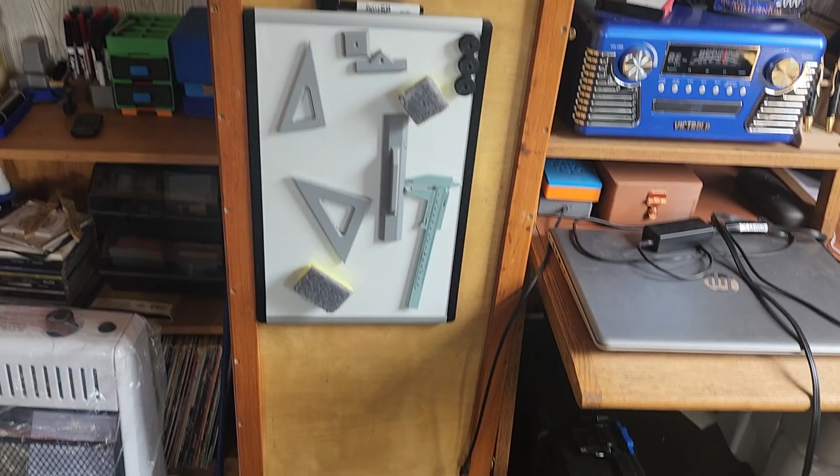This is also storage for my filaments. It's a little better storage than what I currently have, and if you open it up, you can see I got a rack to store different filaments on.

Used to hold my telescope. I had a 10-inch telescope that I stuck in there when I went on a little star party type trips.

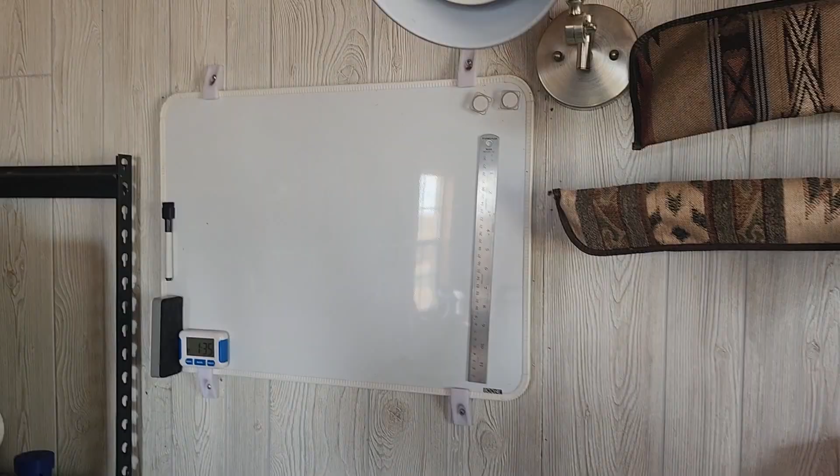Miscellaneous stuff, of course. Got to have bows and black powder when you're out here, so got that, built that rack too. Coming around over here, I got a little whiteboard to keep me going as far as when I got an idea in my head.

I can start drawing with it. And my shelf up here of miscellaneous stuff that I've printed and made, my little foundry area.

So I'll show you my very first printer. These are the second printers I bought. This one was first. That's second, because I liked the first one well enough.

And I bought this last one about December. Bought it then, and this one works really good. I wish I would have bought that one first, but that's not the way life works sometimes.

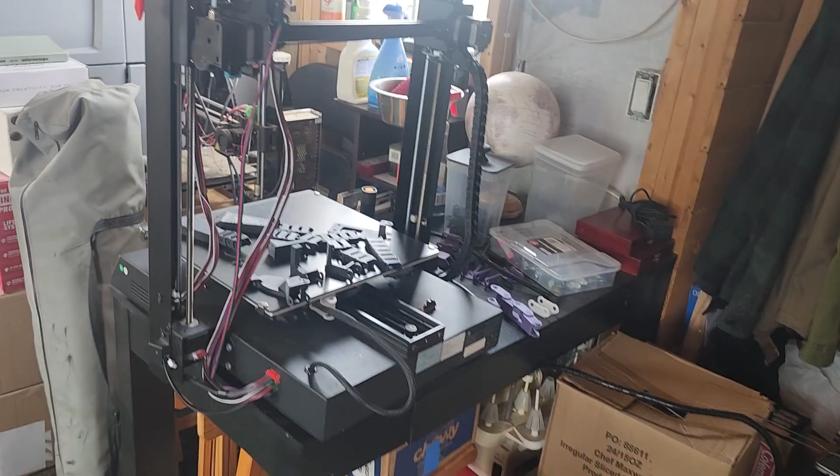And my latest acquisition, excuse the mess, is this one here. And I'm going to get into some parts I had to make for it.

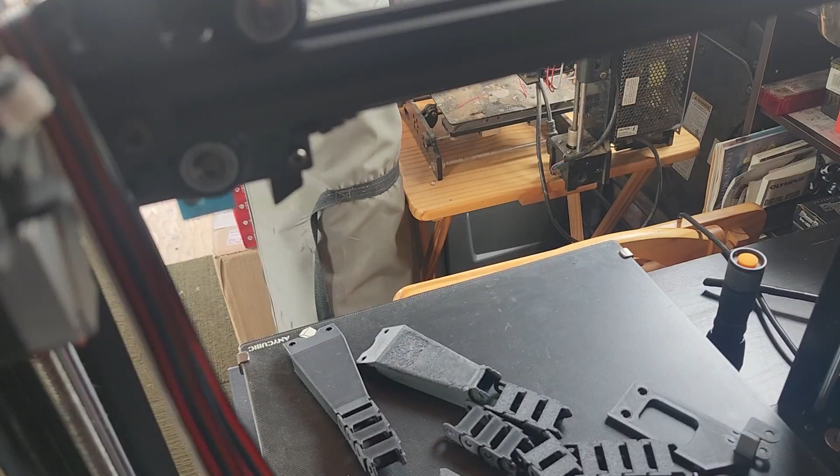Some of the parts are down here. I had to remake this part, and let's see if I can get a good picture of it. This one came up and sat right in here, like so, but it did - oops, there it is.

It didn't work out quite the way I wanted it to, because apparently from the time this part was designed, the printer was changed. The other part I made was this piece right here.

I made a couple iterations of that because I made a mistake when I drew it up.

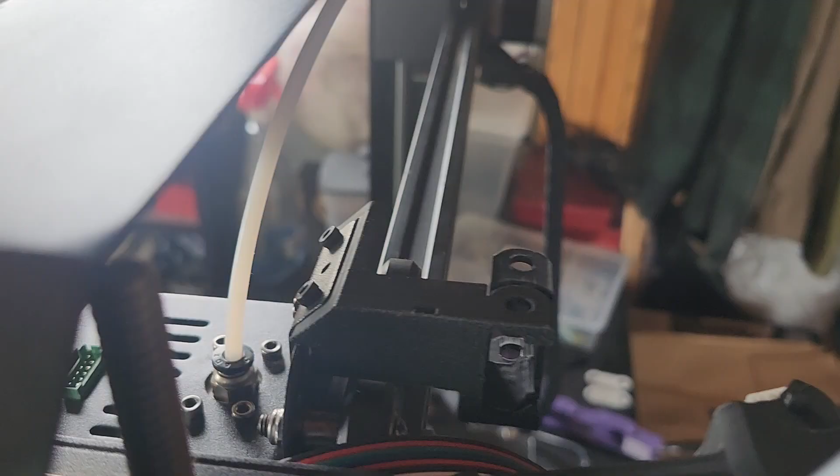This piece over here is at a 45-degree angle. When it was designed originally, it was straight up and down with a slot in it that was supposed to fit over that metal bracket. That didn't work, so I had to remake that.

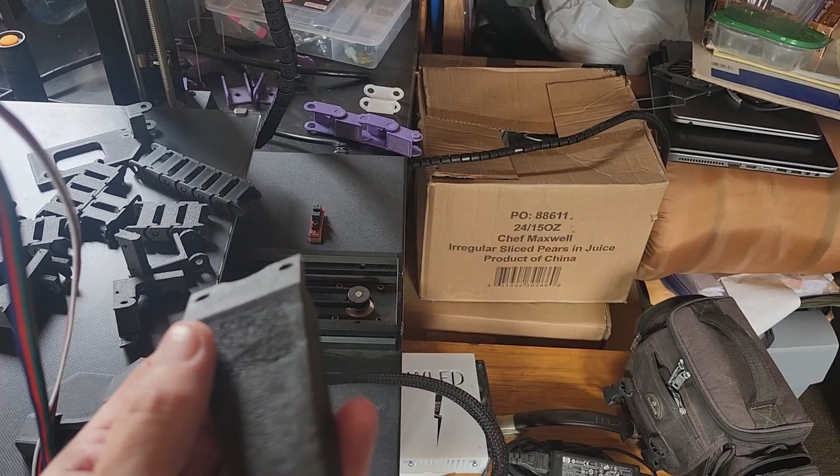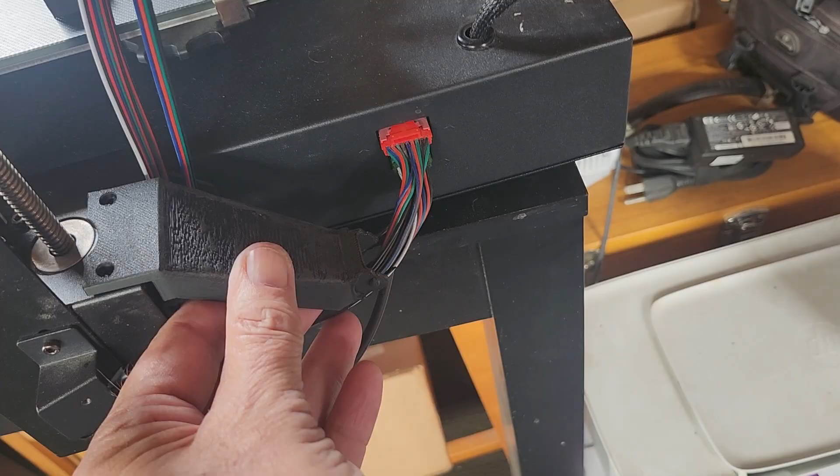And the last piece, excuse the nastiness of this, this is all my fault. You can see how bad that is. I was messing with the supports and it didn't work out quite right. It's kind of nasty and didn't fit right. This one fits down here, but see where the wires would come out, they're going to interfere with all these here.

So I redesigned it, made this piece, and it looks a lot better than what I had. It sits up here, and when it comes out over this area, it goes over the top of all these plugs, so it misses that entirely.

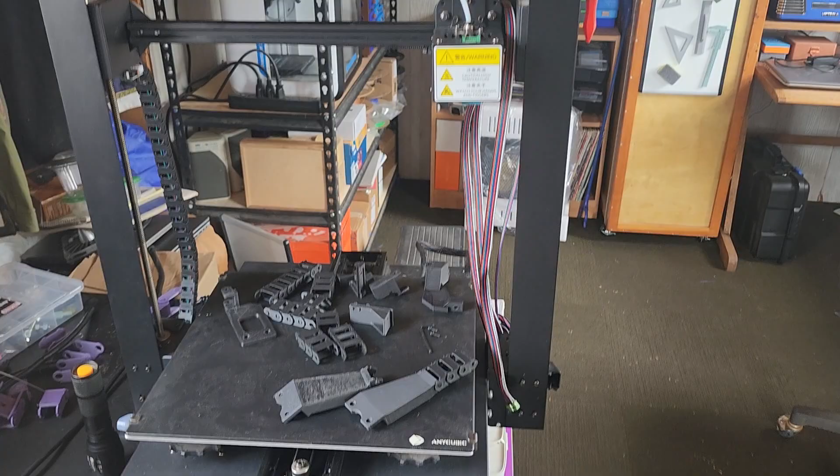This is my latest acquisition. I thought I got a good price on it, and she thought she got a good price on it because she was just going to throw it away. I decided to refurbish it, so I'm making new cable chains.

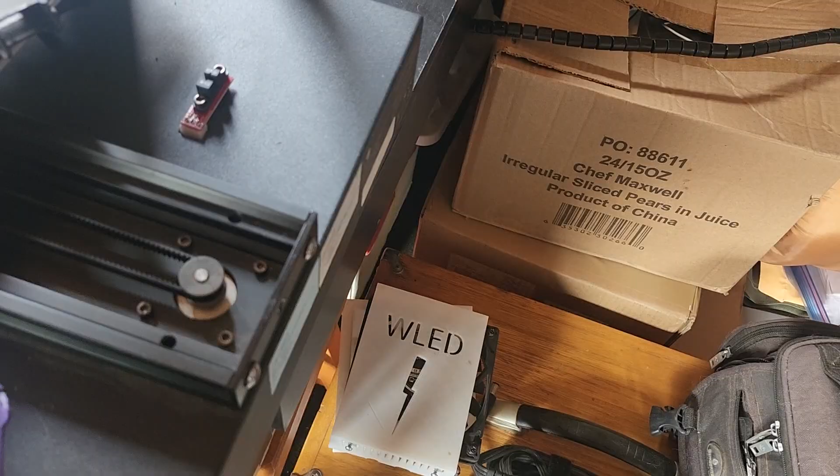This is the first one I got on here. He had these big ones on there, and they sat down at the bottom in here, like so. I didn't care for that, so I found these cable chains.

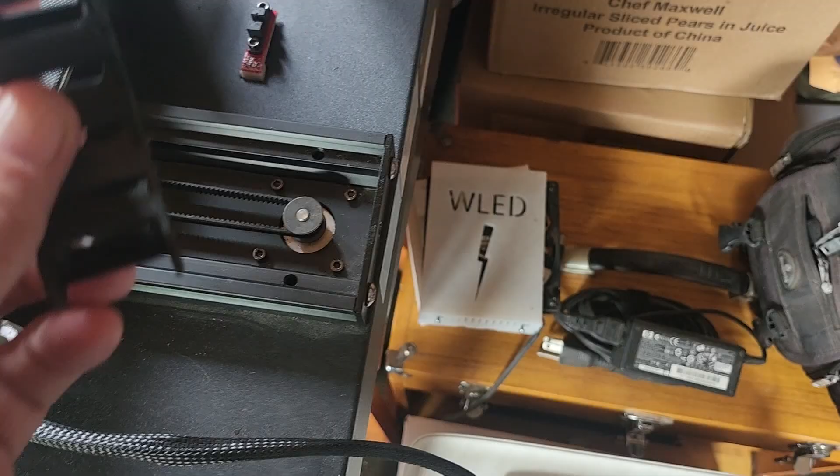I think it was on Thingiverse. If somebody recognizes them, thank you for the job. Those things fit together really nice, and we went from there.

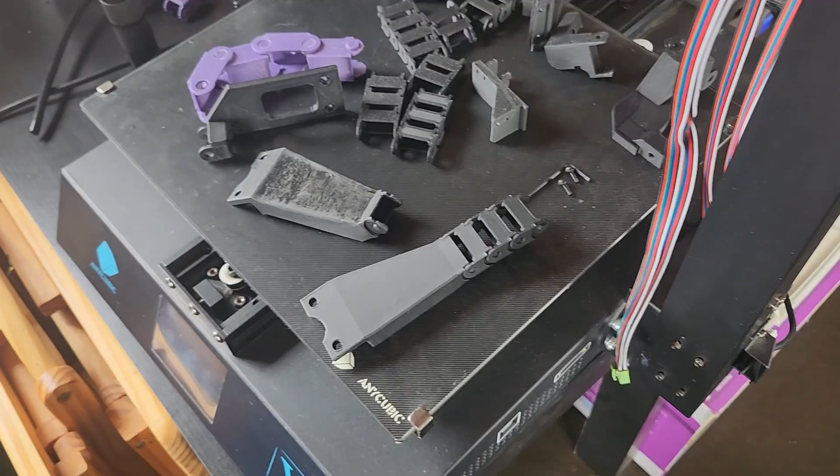So I think what I'll do next is when I get back in the house on the computer, I designed all this stuff in FreeCAD, and I'll go through how and why I designed them and let you know what I did to make them work. That's about it for now, I'll get back inside and go through the modeling in FreeCAD.

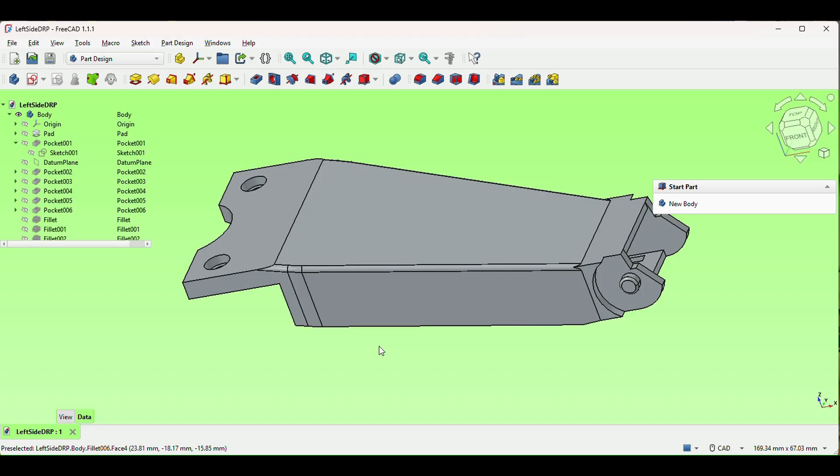Okay, so I'm back inside. Let's get this model opened up. I'm having to do a voiceover because I forgot to turn the microphone on, but this is the part I'm going to try and show you how to model. We'll go through that and see if I can keep up with moving this thing around.

So basically, this is a model. All the parts are there, and let's see what we can come up with. I'll just kind of let you watch as it goes.

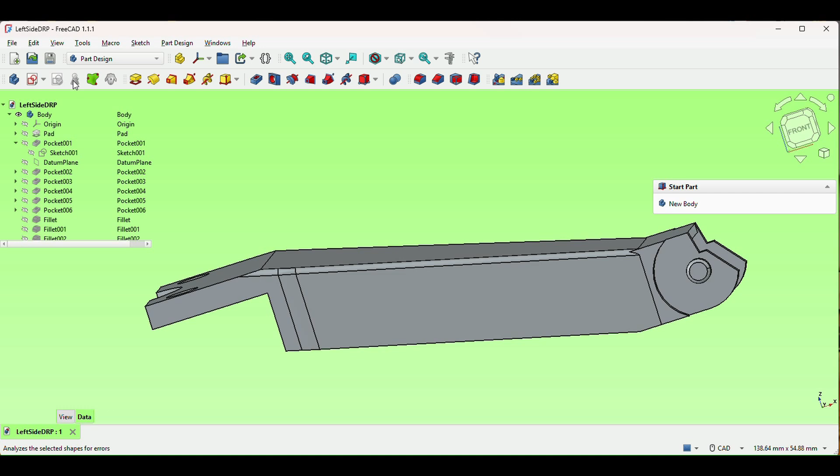Okay, so I like playing with basic shapes, and this is a basic shape of the part. Just a simple sketch, and we'll take it from there one piece at a time.

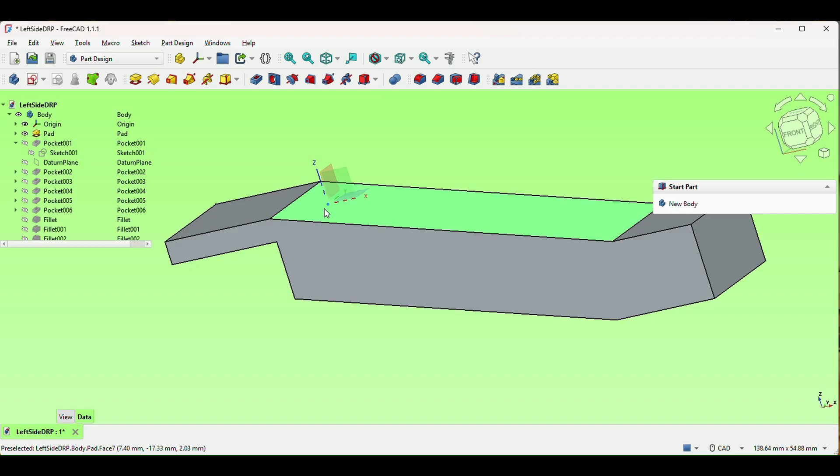Okay, so this part will be mirrored, see the axis. I basically put the first sketch on the center line of the part, and I will mirror it when I get toward the end of it, and we'll see what this thing looks like.

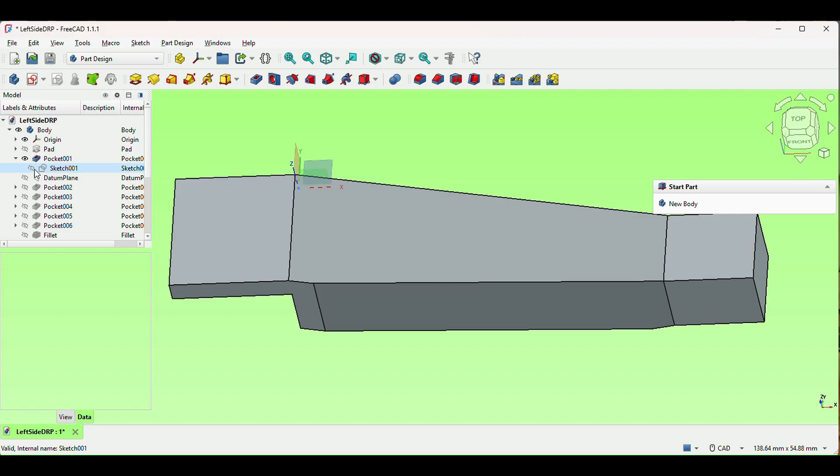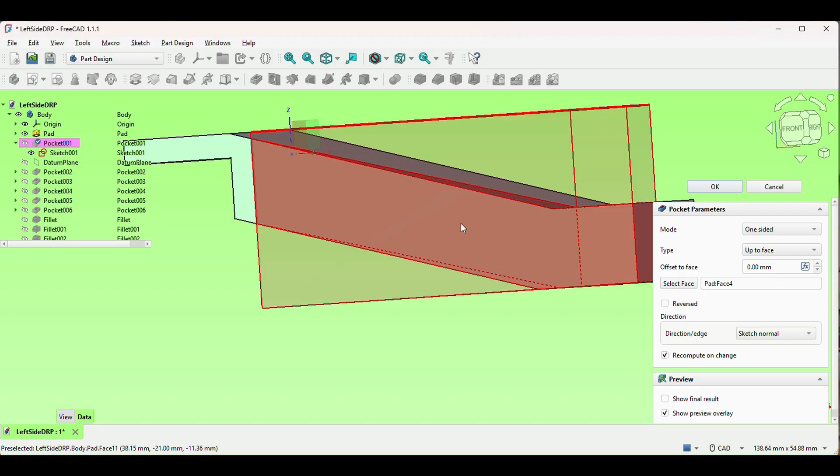Okay, this is a profile of the next sketch, and I do a lot of extrusions up to faces. It just makes everything cleaner and neater looking. So this is the extruded pocket, and I will go down to the very bottom face right there.

Okay, and from here, I'm just going to let you guys kind of follow along as I do my thing, and I'll try and make it make sense the best I can.

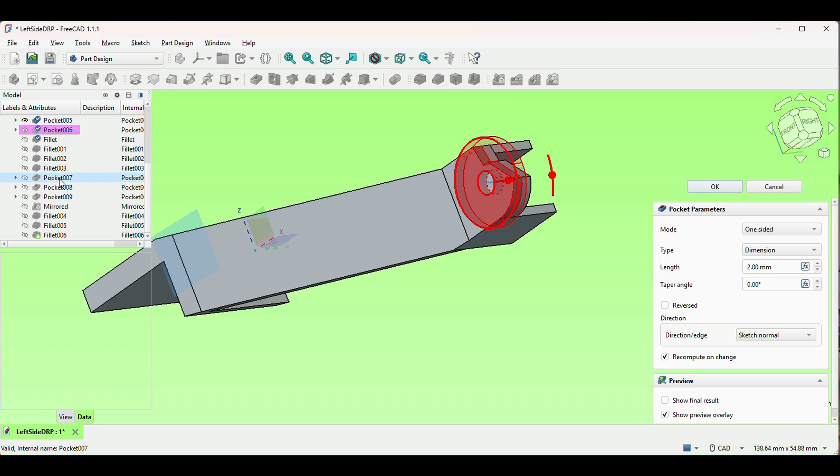Okay, sorry about the 3 minutes of silence there, but I couldn't find any music that I liked, and I hope this works out for you.

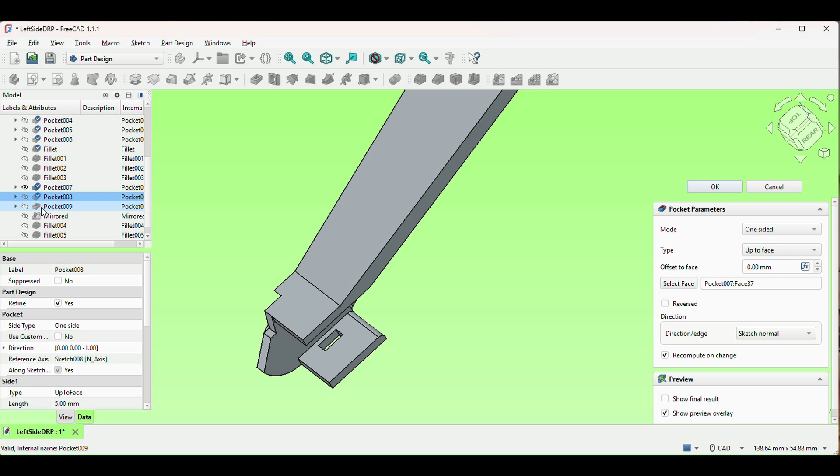I like FreeCAD, it seems to work very well. I hope this video helps you out a little bit. So that's about it, thank you for watching, and talk to y'all later. Bye.